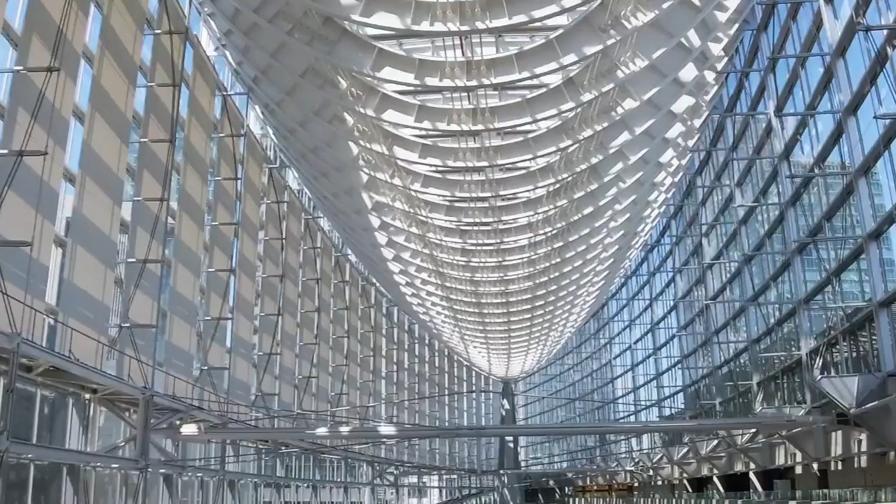Hello, we are Team 1, and we are your guides to show you the whole thing about the Tokyo International Forum with an architecture insight.

Before we talk about our construction, let's listen to the words first from Rafael Viñoly, an architect of this amazing forum. "Today we are all under the expanded influence of fantastic image making. There is a lot of vanity associated with architecture in this term, and this is something about which I feel very dubious."

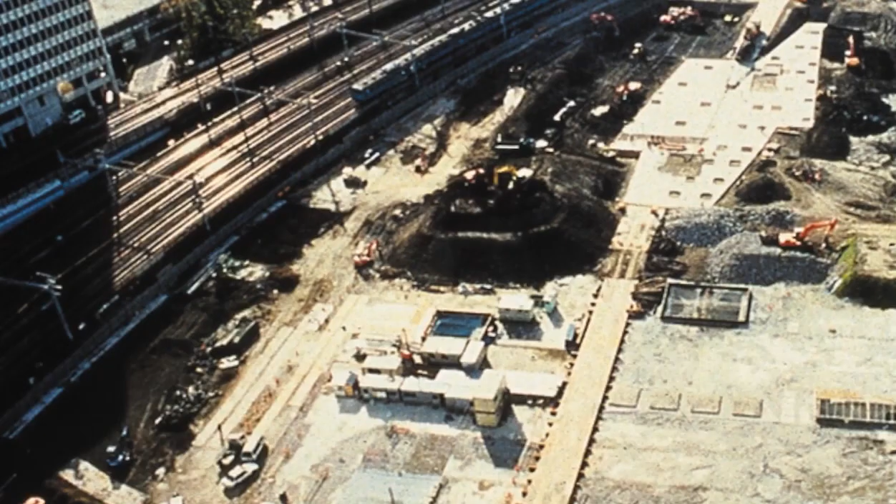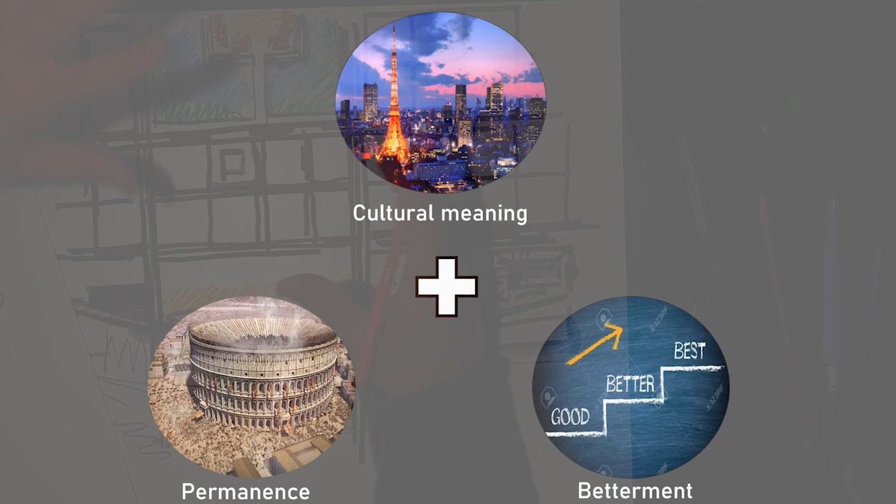Viñoly knew that aesthetics and self-expression are important in architecture, but he also emphasized that the satisfaction of social requirements should precede it. He designed the Tokyo International Forum with the faith that architects should satisfy the client's requirements, and that architects should find the mechanism which ensures the proposal can be enriched and transformed into something which has cultural meaning, and which contributes to the sense of permanence and betterment of the city.

Okay then, who was the client of this building and what were the requirements which can enrich the cultural meaning and develop the city? So today, let's look at the background information and the design process, which is followed by the construction. This story will give us the key for the next step discussion, the key for the construction study.

The site of the forum, where there was originally the City Hall of Tokyo Metropolitan Government, was vacated as part of the master plan which called for relocating the City Hall to the city's suburb in order to restore civic and cultural functions to the center. So there is a liberated 28,000 square meter site in the heart of the city, an immeasurably huge site for Tokyo. The site occupies a key position on the boundary between Marunouchi, Tokyo's vital central business area, and the elegant Ginza shopping and entertainment district.

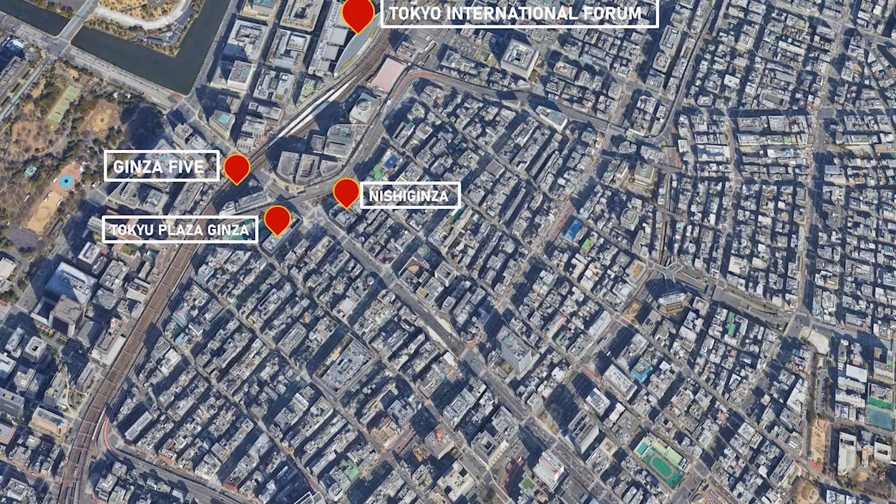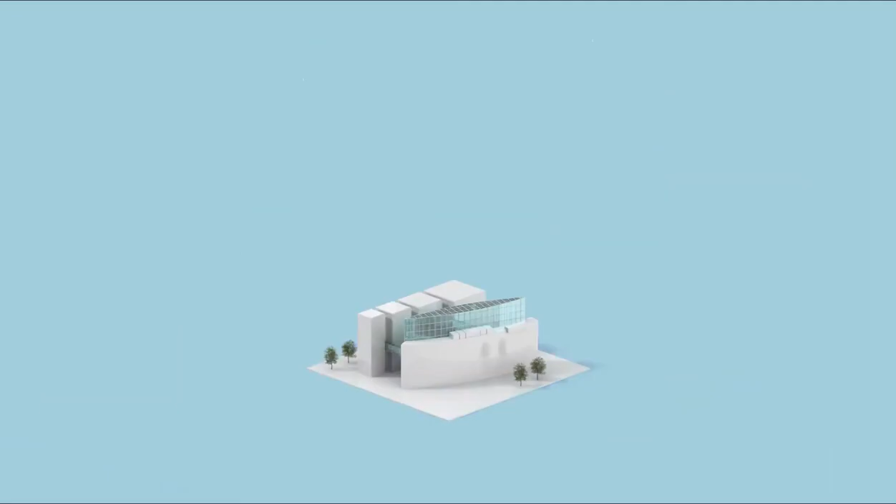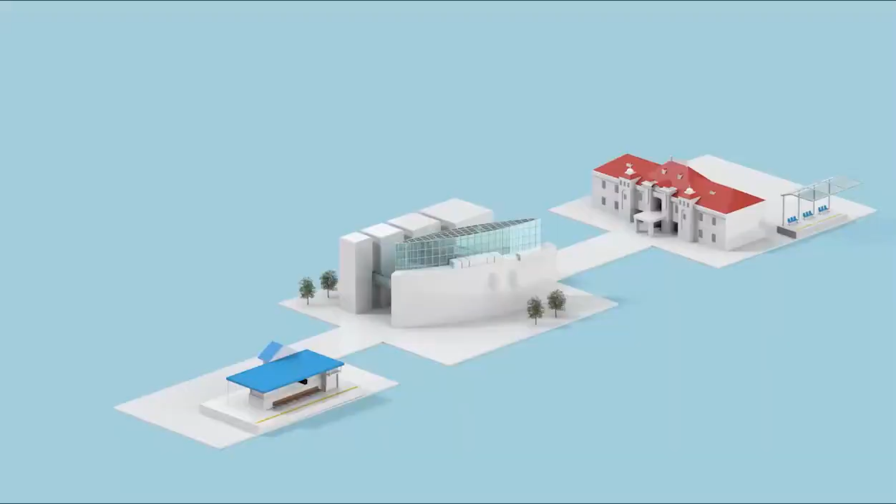The site faces the outer Imperial Palace gardens to the west and is bounded on the east by the tracks of Japan Railways, the city's principal system of transportation. It is a highly consolidated urban setting characterized both by the grid of institutional buildings surrounding the Imperial Gardens and the curvilinear sweep of the railway. 4 subway lines and 2 of the most used train stations, Tokyo and Yurakucho stations, are located to the north and south of the site respectively, generating significant pedestrian traffic in the area. And these site characteristics will be the key point for the design and construction conditions.

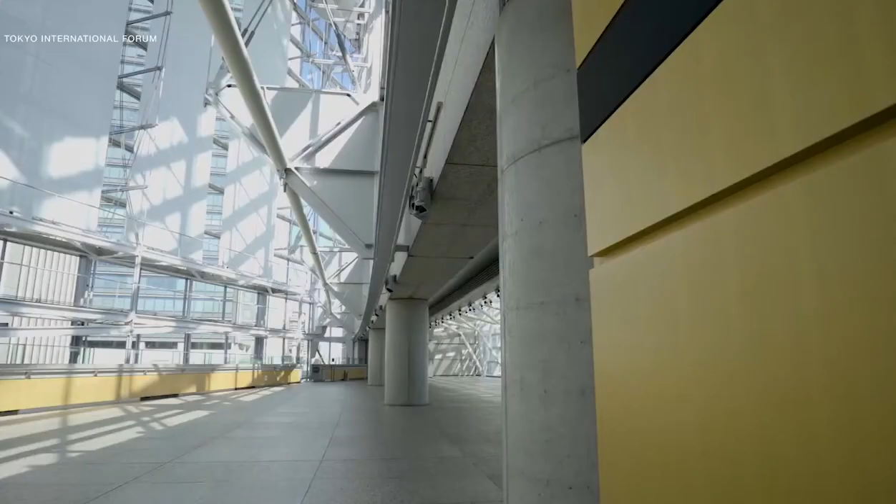Okay, that was the background and conditions of the project. So the Tokyo city government made the project requirements based on them. Let's look at it together. The complex was to accommodate dance, musical, and theatrical performances in 4 theaters ranging from 600 to 5,000 seats. Each theater was required to have equal status with regard to the main entrance space of the complex.

A major requirement was a strong north-south pedestrian connection through the site between Tokyo and Yurakucho stations, through which around 7 million people move every day very efficiently. Finally, the brief called for a 4,000 square meter open public plaza. The brief for the forum described an ambition for a unique civic institution intended to serve as the focus of the cultural and business activities in the capital city of Japan.

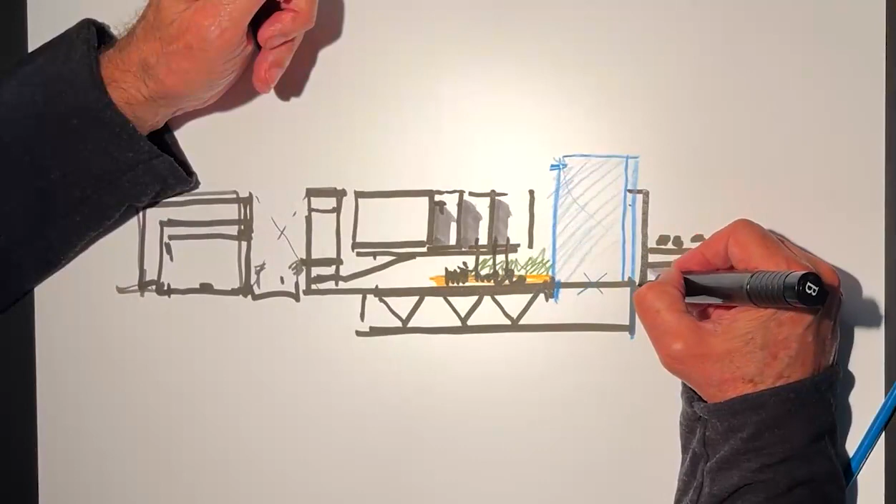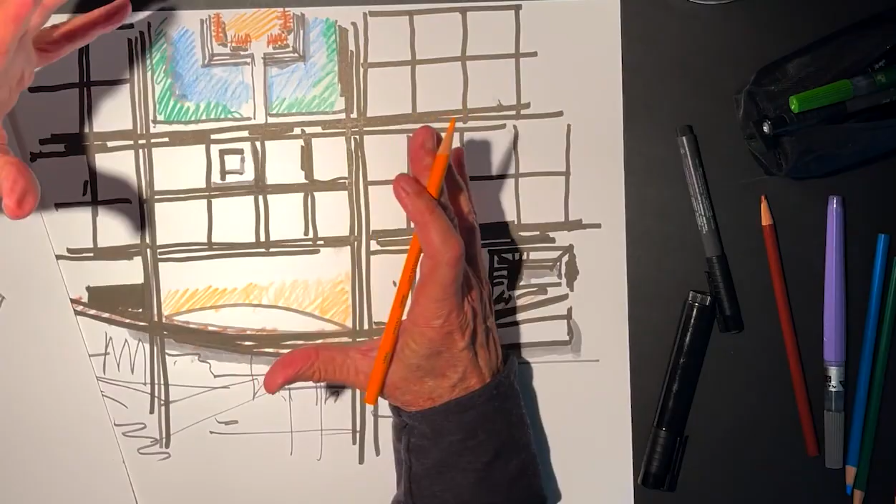As we said, Viñoly's architectural philosophy is to satisfy the client's requirements and at the same time to place cultural meaning in a building. So his design ideas also came from the site analysis and requirements from Tokyo City. The breakthrough idea came when the existing contour of the railway viaduct was flipped over to make an elongated boat-shaped figure at the eastern edge of the site. This made a circulation guideline through the site and created a freely accessible space at the heart of the ground level plan that is both linear and central, the main civic space of the scheme.

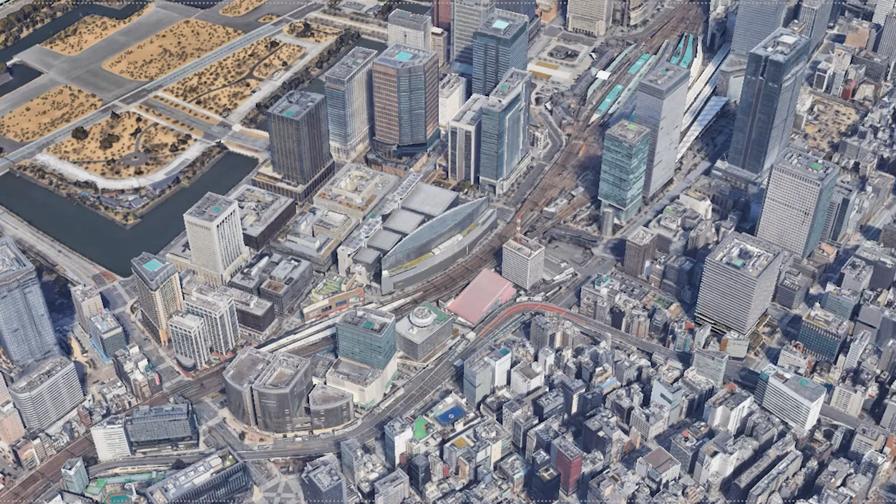The scheme has four major components: the protective perimeter wall, the theaters, the glass hall, and the plaza. The plan of the building is a response to the two adjacent urban geometries: the gridded commercial blocks of the business district to the west and the railway, and more informal character of the Ginza shopping district to the east.

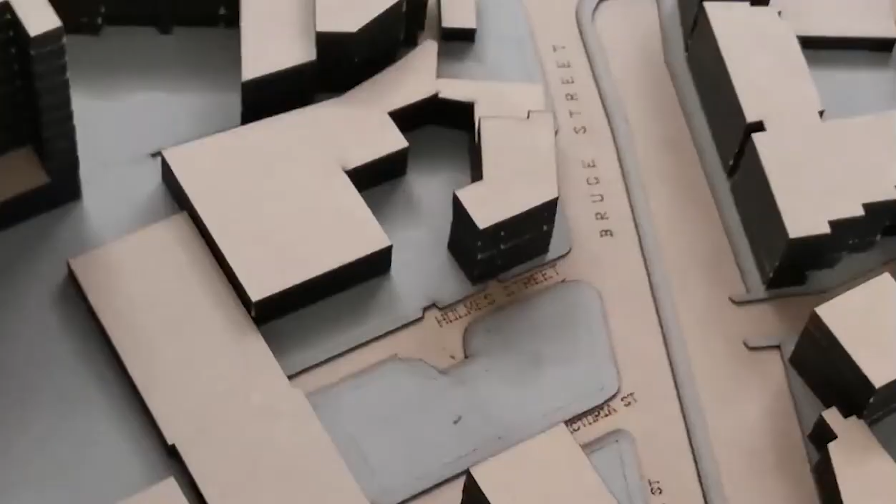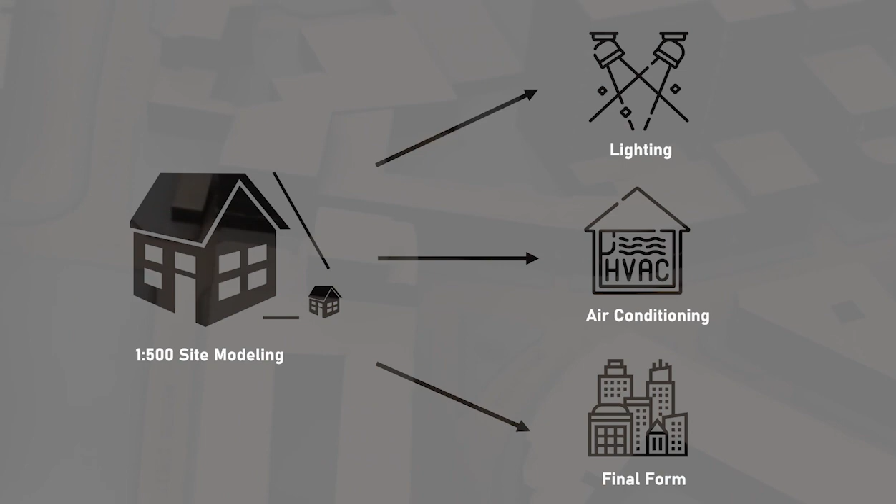The building was designed primarily through a series of working models, done at many scales ranging from 1 to 500 site models, to full-scale mock-ups of connection details. The final model of the whole building is nearly 7.5 meters long and includes every detail of the lighting system, the air conditioning system, the final form of the structure, and else.

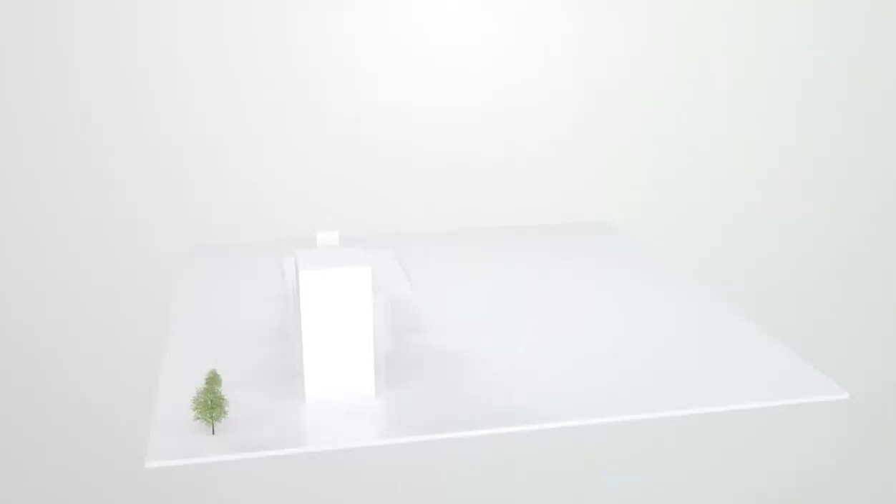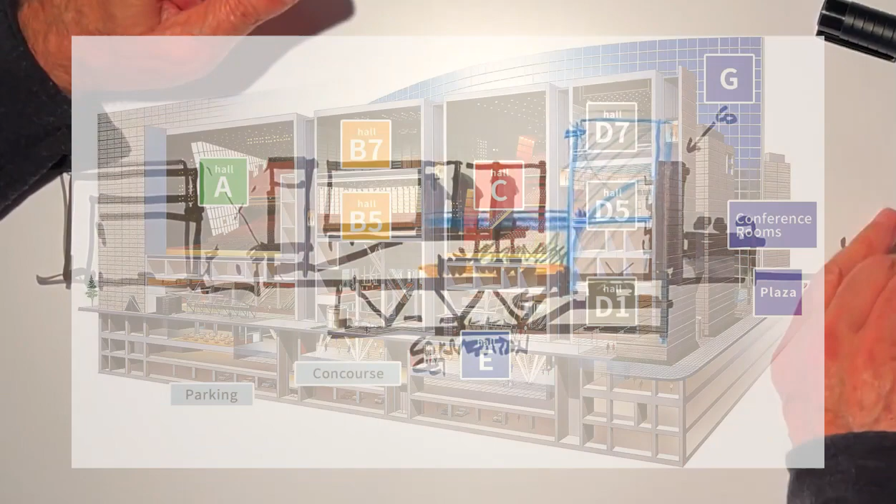So, here is the real building of what he had designed. Let's see the whole space program of it and get some insights about architectural or construction study. The four theaters are placed along the western edge of the site, with their fly towers contained in a thin slab building which faces the downtown grid. While all are derived from the same three-dimensional 9-meter module, the theaters diminish in size as the site narrows to the south. Let's get inside.

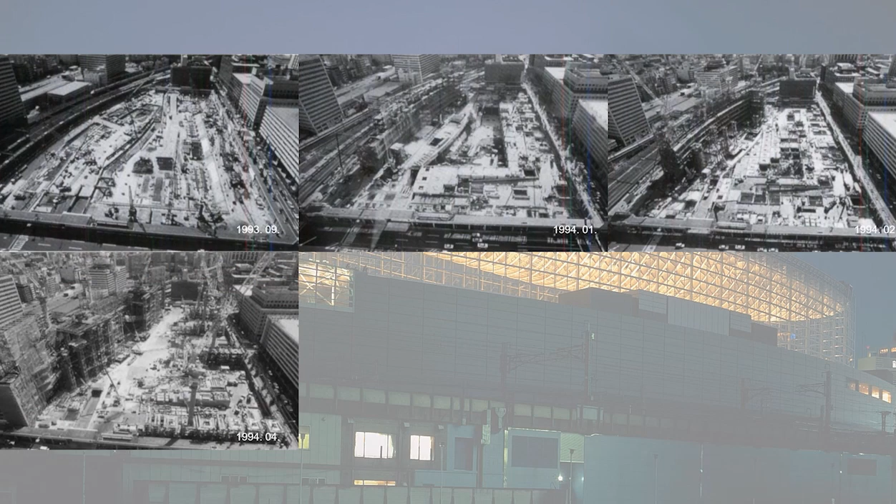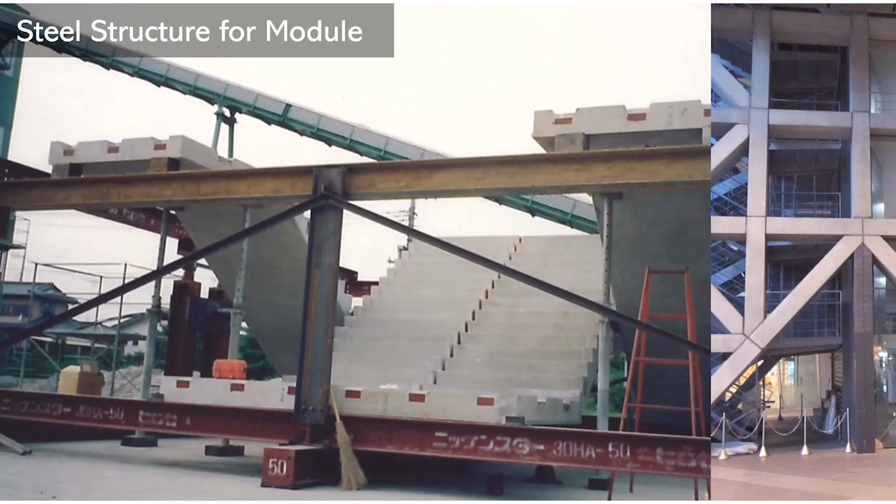First, Hall A is a 5,000-seat theater which is intended to be used for events ranging from kabuki theater to rock concerts. The whole building was built on an incredibly fast program of 48 months from beginning to end. So, an important consideration in the development of the detail of the Hall A was the fact that we had to build the theater in the factory and bring it to site practically complete because there was no time in the construction program to build scaffolding inside the space.

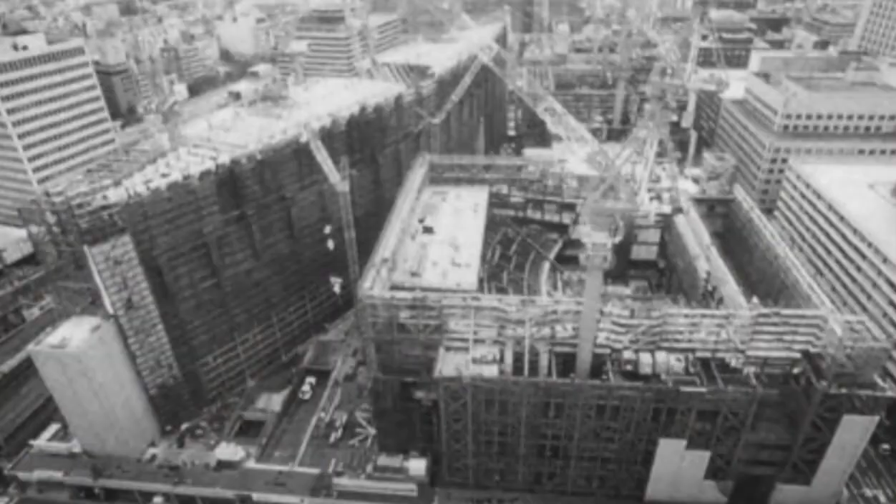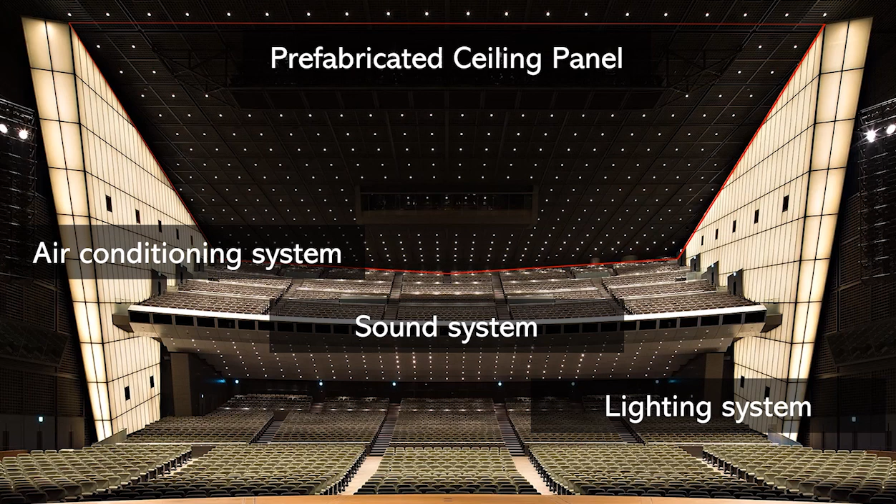The design of the ceiling is predicated on its ability to be prefabricated and spliced together with the superstructure. This entailed careful coordination of air conditioning systems with sound and lighting systems, all of which were installed in the prefabricated ceiling panels in the factory before the steel superstructure was completed.

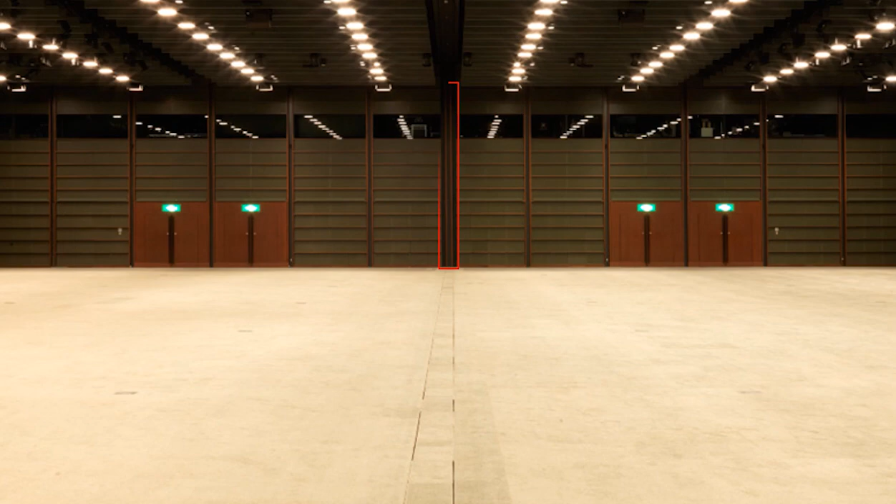Hall B is a flexible space for 3,000 people, which is used primarily as an annual convention hall. The ceiling is divided into 65 movable panels, which are moved with the aid of a small motor linked by computer to the panels. The hall can be divided into smaller spaces by shoji screens. Hall C is a musical hall with 1,500 seats, so it had to be a resonant, reverberant interior.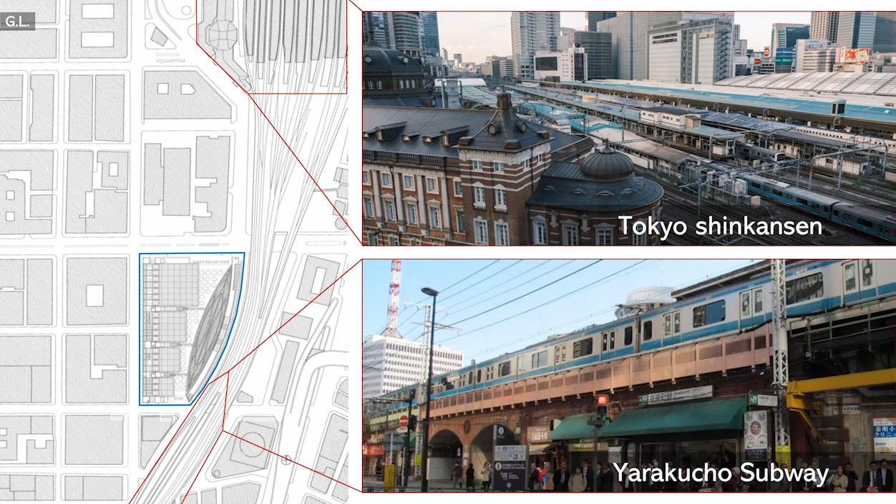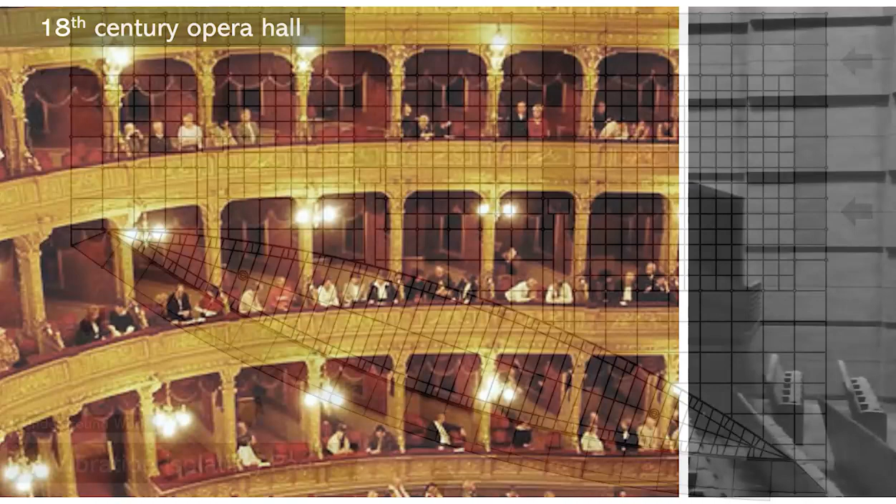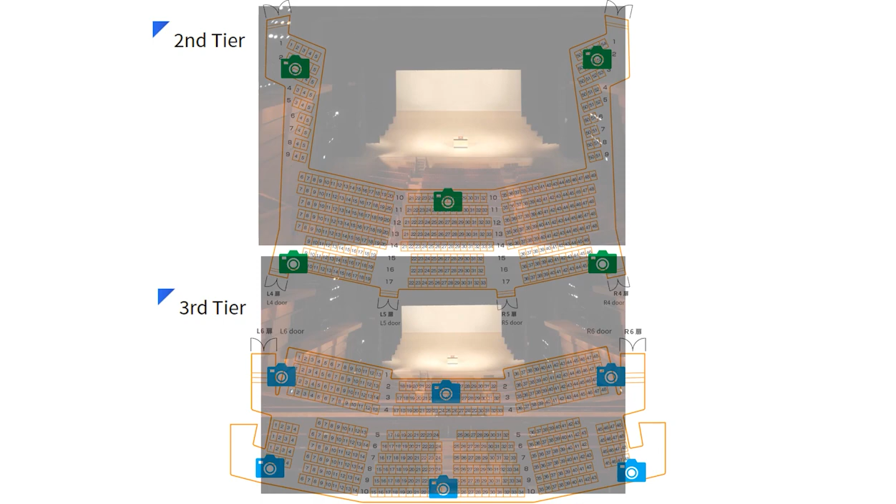Because this is a performing arts center surrounded by train and subway lines, the whole building is acoustically isolated on elaborate foundations consisting of two walls around the entire perimeter of the site, which are separated by vibration isolating pads. Another proven strategy which he adopted is derived from the typical box of the traditional 18th century opera hall, in which balconies produced multiple reflections of the early signal to the audience in the center of the hall. Balconies work incredibly well acoustically as well as structurally.

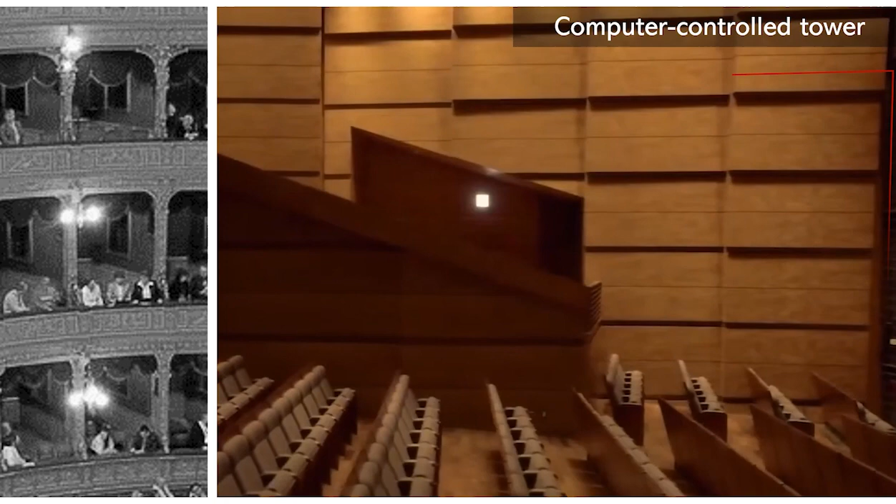Instead of balconies, it has computer-controlled towers along the walls of the hall. The computer can change the angles and reflectivity of the wood cladding on the towers, which has been designed to enhance the pattern of acoustic reflections. About the acoustics of these theater halls, we will treat them on week 10.

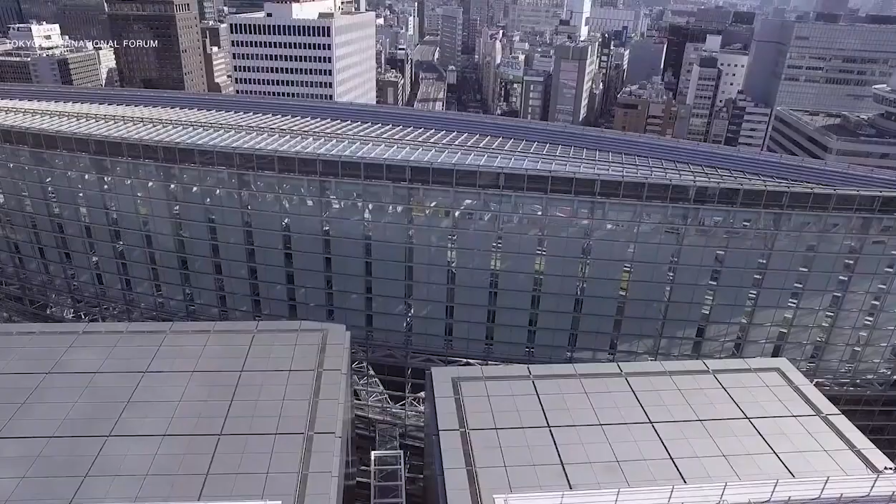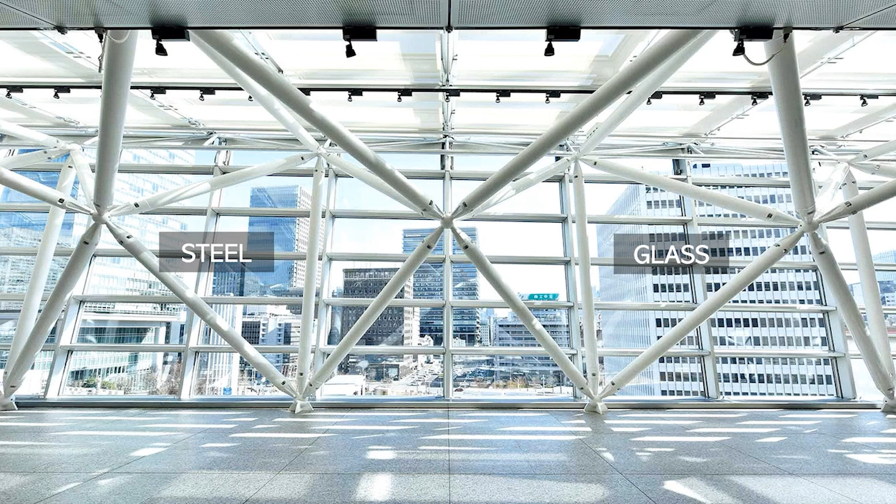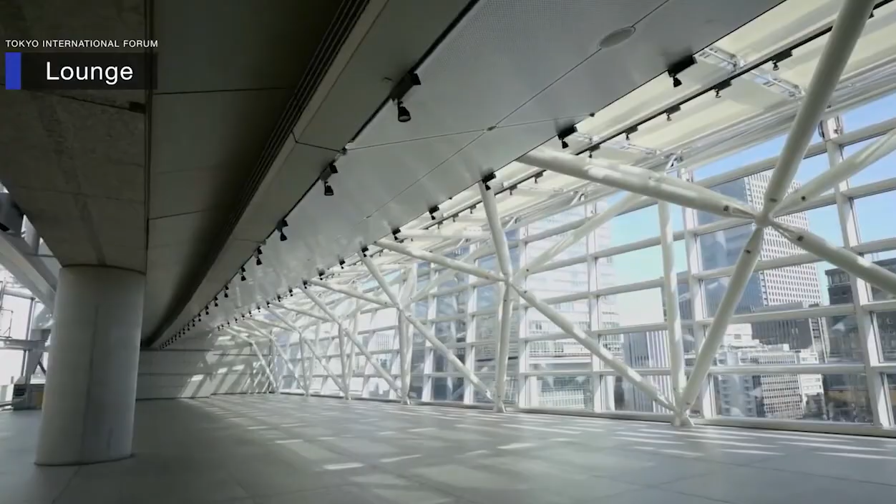To the east, the lens-shaped glass hall is held by a curved slab shielding the complex from the railway. The most dramatic space of the complex is a 60-meter-high transparent enclosure of steel and glass in the architectural tradition of the great 19th century civic spaces. The glass hall is essentially about light and transparency. The structure of the glass hall is very simple. Having often said that architecture is the art of dealing with heaviness, the glass hall is intended to challenge gravity, to be a display of lightness.

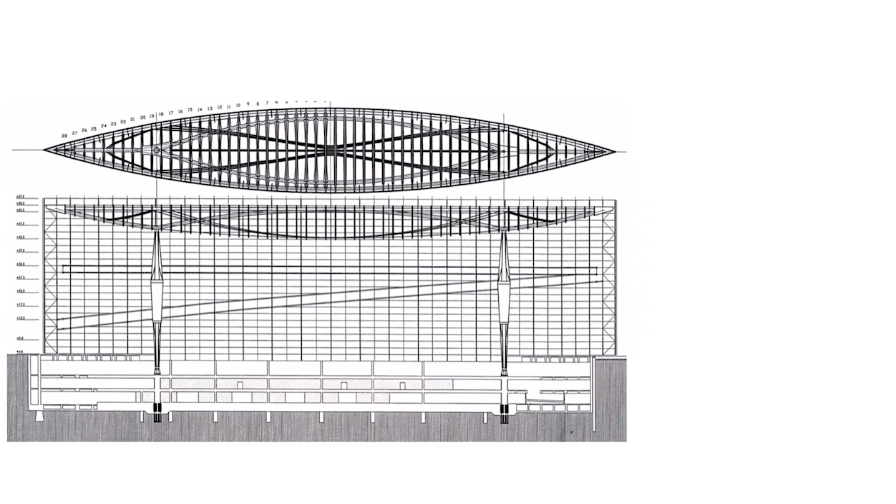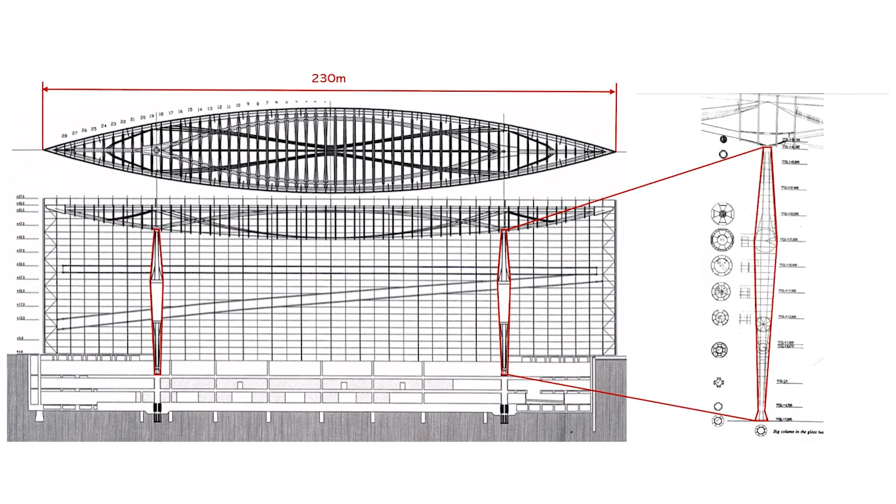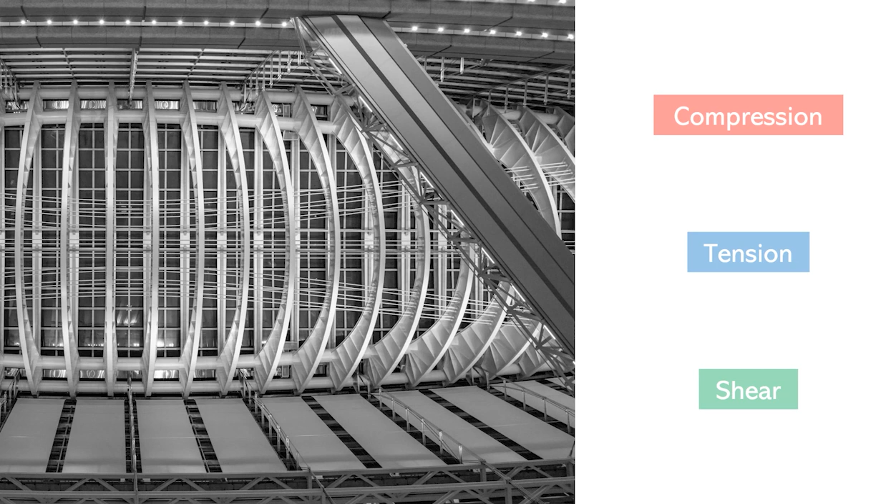Two monumental columns have articulated pin connections at both top and bottom. The shape of the columns is a result of the moment of inertia of the horizontal structure. A single roof truss spans 230 meters between the two columns. The boat shape of the truss enables it to accommodate the maximum width of the space at the center and the minimum width at the end. The profile of the truss is derived from its stress diagram. The structure is basically a compression ring and two parabolic beams which are attached to the capitals at the tops of the columns.

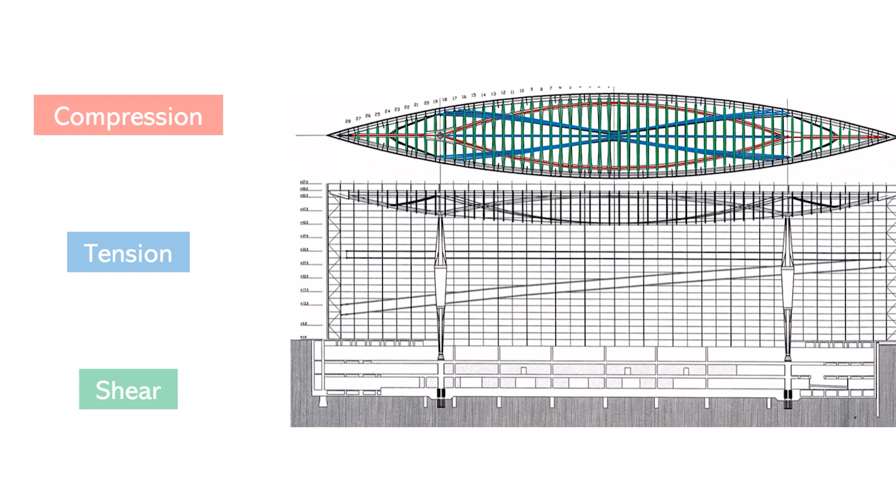It is designed to reflect the nature of the forces of compression, tension, and shear. Compression, of course, is taken by the parabolic arches. Tension is dealt with by the longitudinal cables, and the ribs of the truss connect tension and compression members and deal with shear. The ribs are thin at the center of the span where shear is minimal, and thick at the ends where shear is greatest.

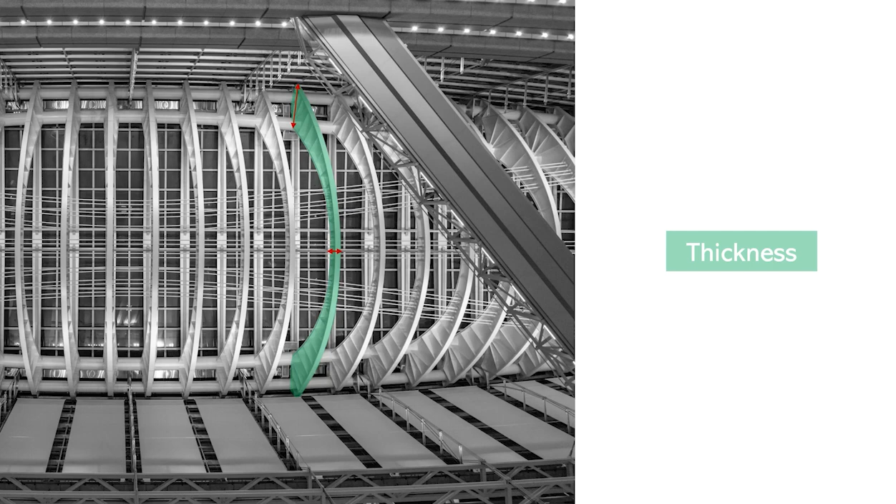The wall of the glass hull is a system of cable-stayed trusses, which also emphasize lightness and transparency. This tension structure is hung from the roof truss and anchored to the plaza slab. A detailed structural analysis of the roof truss and glass hull we will show you in week 9.

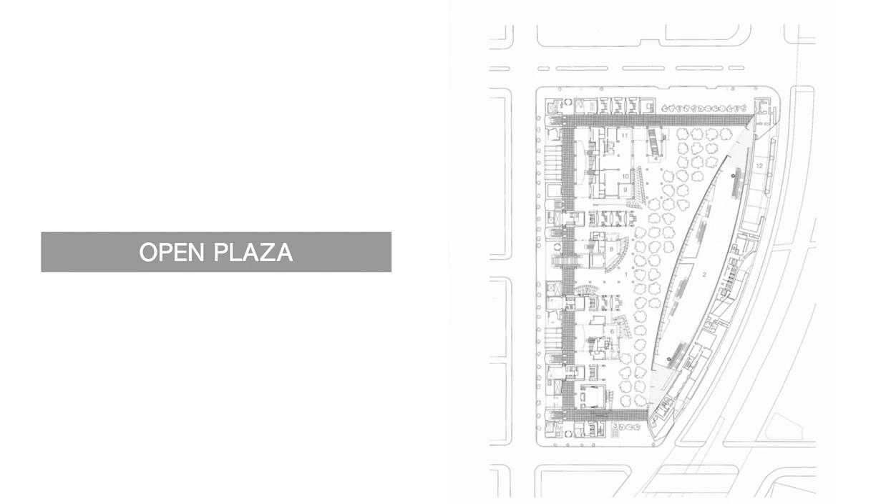The plaza is both a space of transit and a destination, both the space between the theaters and the glass hull. It is a generous open-air plaza, a lavish display of Japan's scarcest thing, space. Under the landscape plan of the plaza, a large concourse connects the access from the project to several lines of local and regional rail networks.

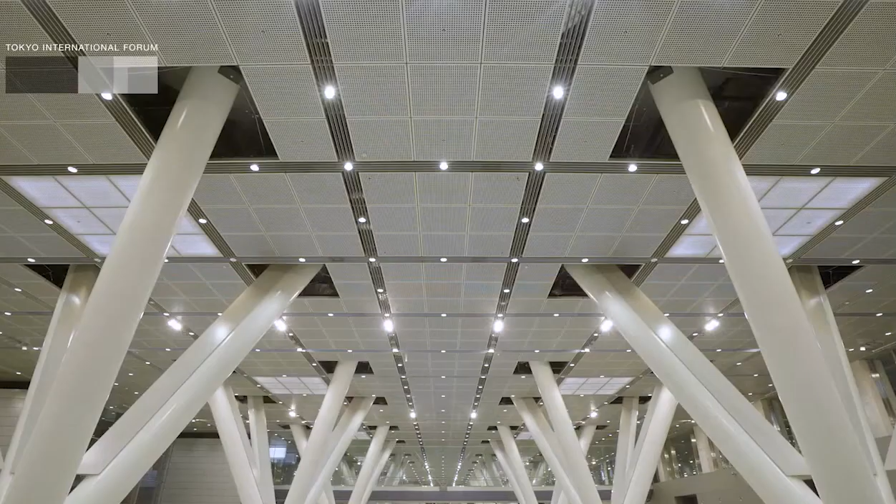The circulation space wraps around a large exhibition center and becomes itself the main floor of the glass hall. And we can see the cross-shaped columns at the center of the concourse hall. This is an idea of the architect for the parking space underground. The details of the underground construction will also be treated soon, in weeks 5 and 6.

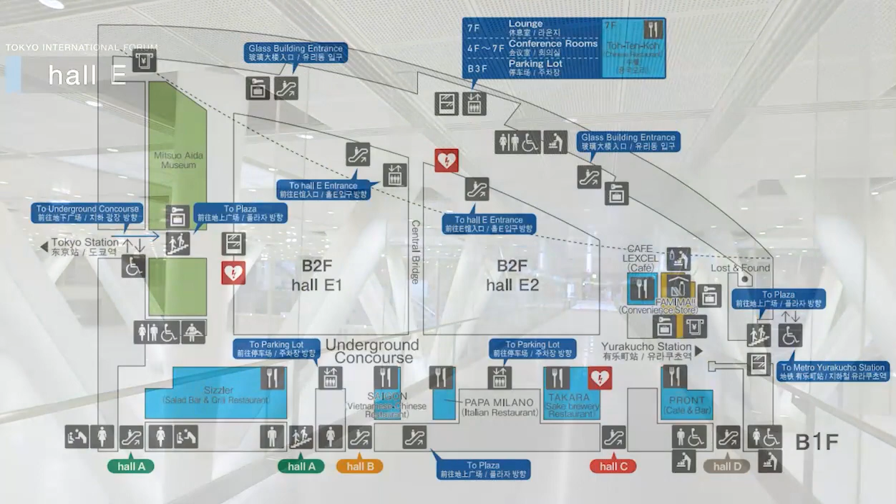All functions of the building are accessible from the concourse level. The theaters have direct entrances from the street as well as from the concourse below, so that they can be used independently or altogether. The conference rooms are connected to the theaters through a network of bridges across these voids, creating total flexibility of usage among the various components of the complex.

A zigzag ramp in the glass hall from the plaza to the top of the building gives an overlook of the city and Tokyo Bay. The ramp along the length of the glass hall, which carries visitors up to the roof, is intersected by several bridges which work essentially as horizontal struts to resist the wind pressure on the walls of the glass hall, and they also work for connecting spaces.

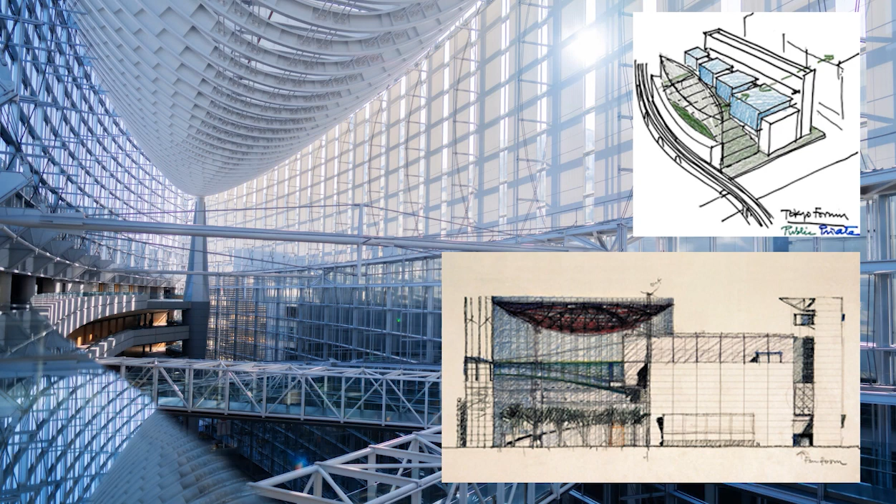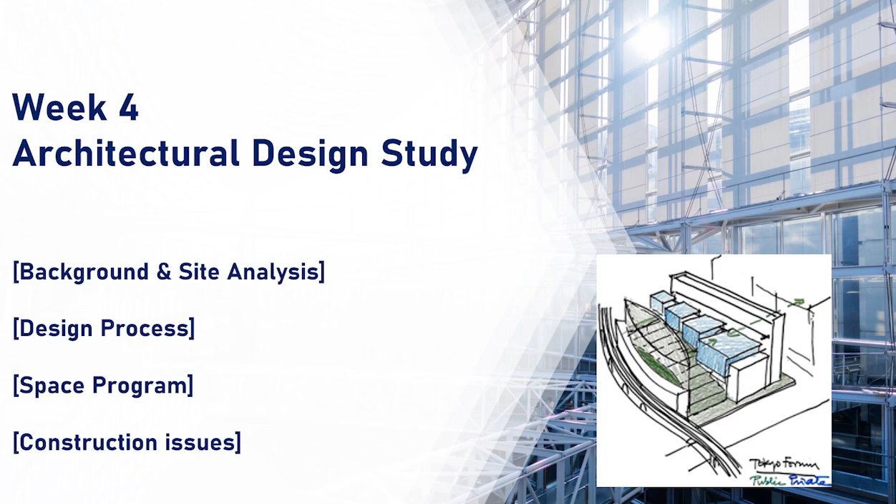Now, we just overlooked this incredible landmark of Tokyo with an insight of the architect. We got lots of hints from this work, so we were able to make our whole semester plan from it. So, let's see. Fourth week's main topic was architectural design study. It was today's video, and we discussed background and site analysis, design process, space program, and construction issues. We can get various study targets from the Tokyo International Forum, so let us tell you the whole semester plan.

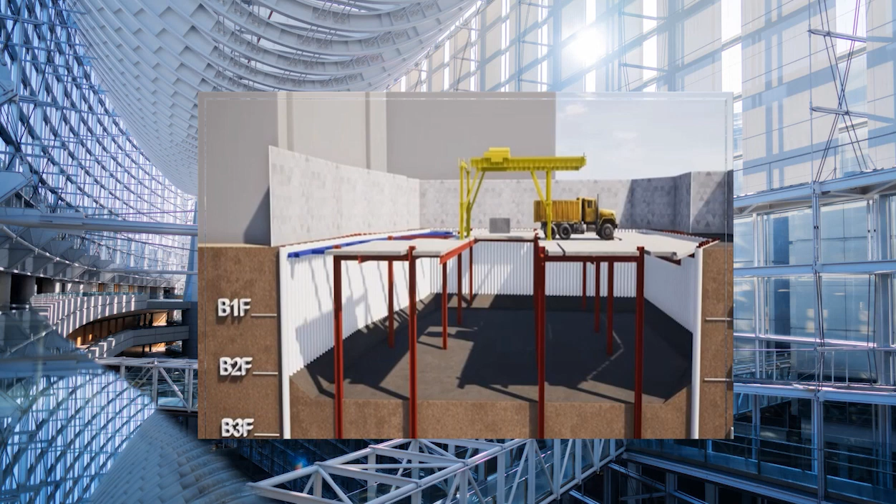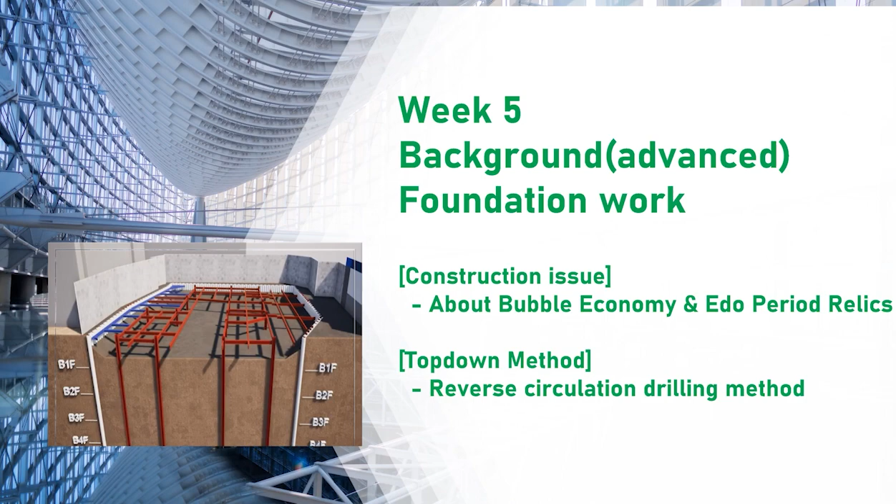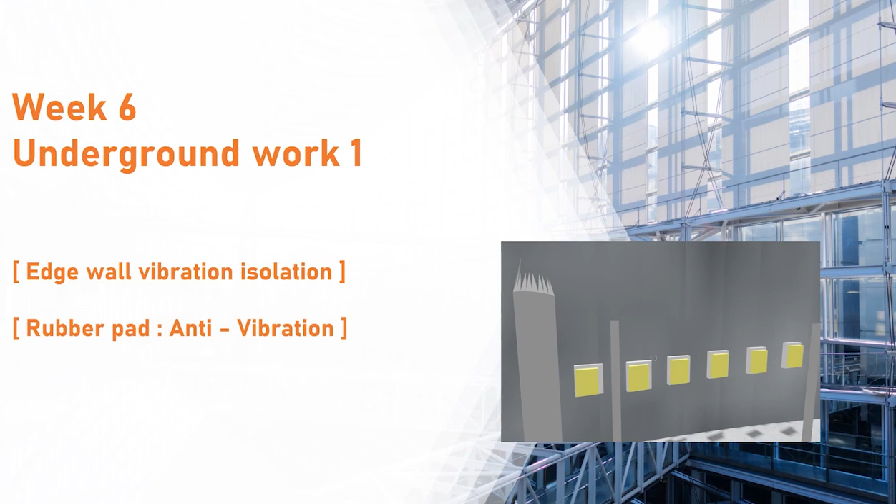Fifth week's main topic is background and foundation work. We will specifically discuss how the discovery of Edo period artifacts affected the construction schedule. Additionally, we will explain how and why the underground reverse construction method was used and why it was suitable for the Tokyo Forum. Sixth week's main topic is underground work. It will explain how subway vibrations were addressed during underground construction.

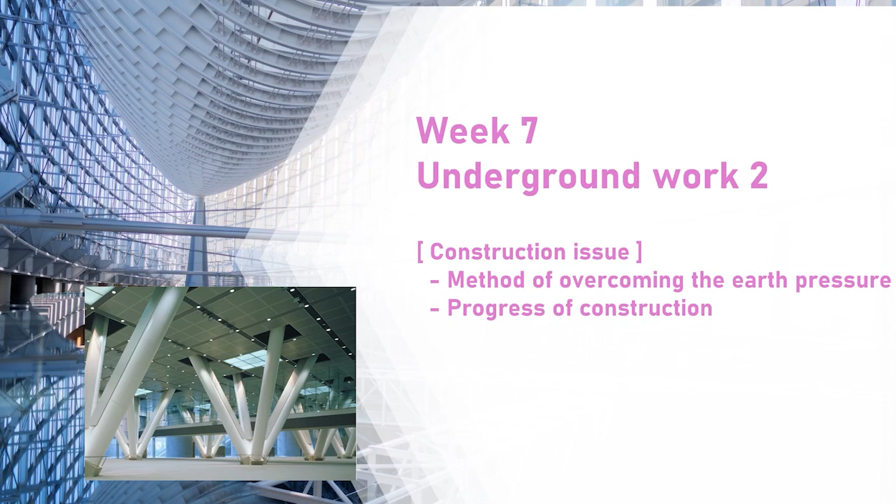Seventh week's main topic is underground work 2 and PC Bridge. We will discuss construction issues encountered during underground work, how they were resolved, and how these resolutions affected the construction process of the PC Bridge. Eighth week's main topic is groundwork 1 and pillar. We will explain why the stiffness of the upper and lower concrete sections differed and discuss pillar stiffness and concrete.

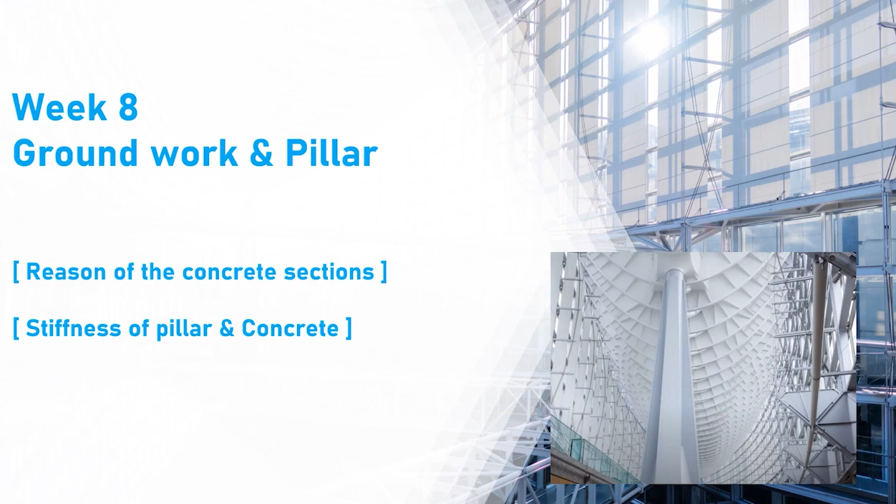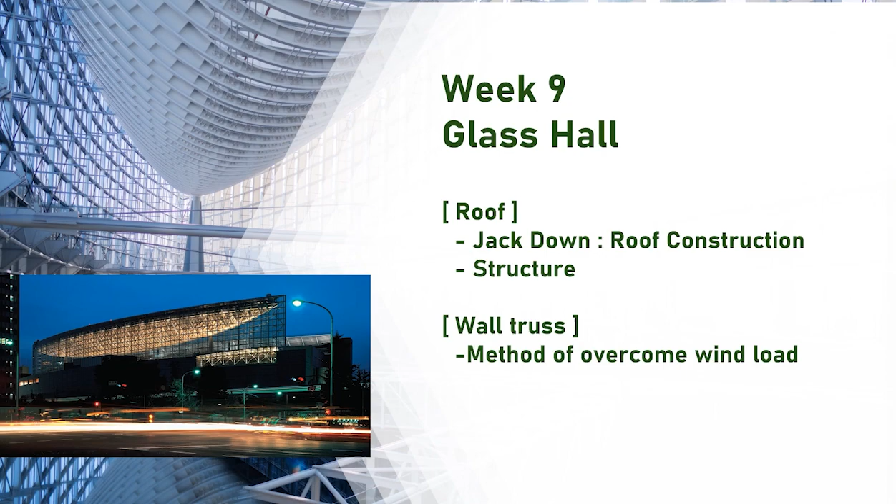Ninth week's main topic is Glass Hall. We deal with the process of construction of the roof and how the truss structure of the walls was designed to withstand wind loads. 10th week's main topic is concert hall acoustic problem solution. Let's discuss the construction process of the concert hall, which faced many challenges due to being surrounded by subway lines, and how these challenges were overcome.

11th week's main topic is interior and station bridge. We will talk about the interior design of the building and the connection between the Tokyo subway and the station bridge.